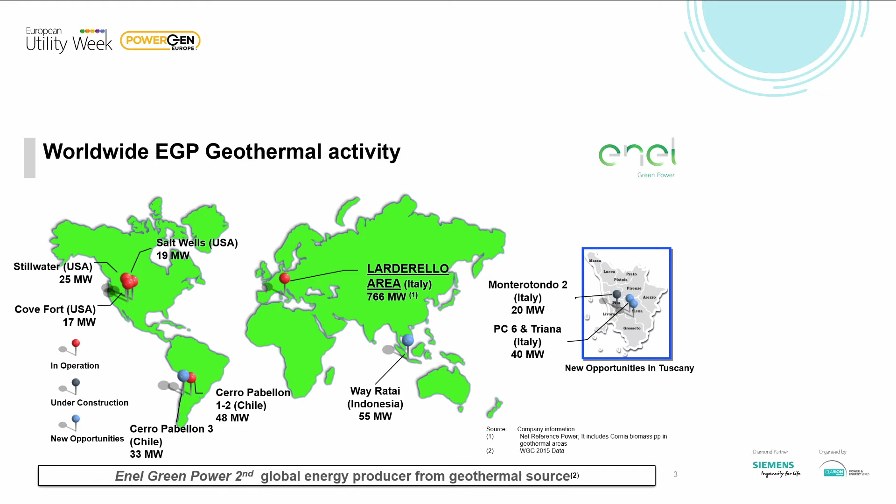Enel Green Power has also some power plants in North America, 2 in Nevada and 1 in Utah, and another in South America, in Chile, at Cerro Pabellon. There are also other projects ongoing, like the third unit in Cerro Pabellon, a new project in Indonesia, and so on. I'll go quickly.

About Enel Green Power activity in Italy. As said before, 37 power plants are in operation with more or less 500 production and reinjection wells. These 37 power plants guarantee a yearly electric production of more or less 5.7 terawatt hours, which covers 30% of the electric demand of the entire Tuscany region.

The geothermal activity in Italy, in Tuscany, also involves more or less 1,800 employees, including direct and indirect employees. Here I reported also some strength points about Enel Green Power in the geothermal field.

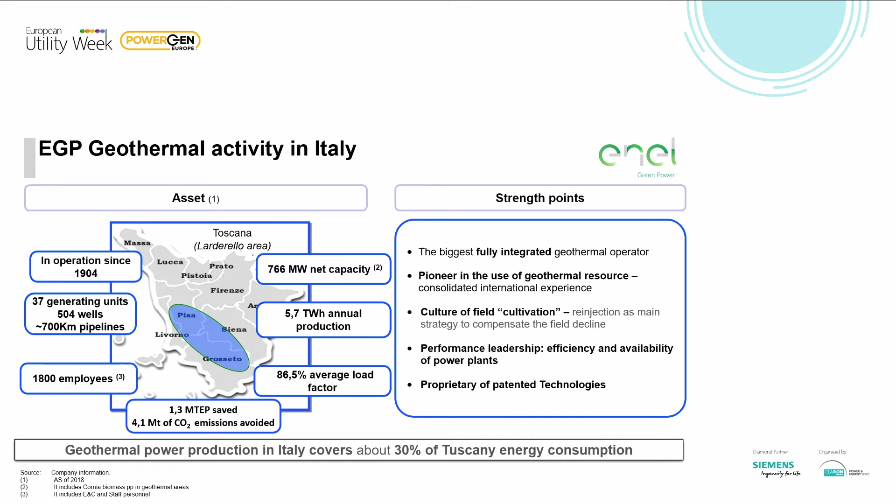Enel Green Power is the biggest fully integrated geothermal operator, which means that Enel Green Power covers internally all the different phases of a geothermal project, from the resource assessment, drilling phase, design and construction of the power plant, to the operation and maintenance of the power plant. Enel Green Power is also proprietary of patented technologies like AMIS technology, which is used for the pollutants abatement in the geothermal gases.

I want to give you some information also about the history of geothermal production. As you can see from the slide, the first geothermal power plant in Italy and in the world was realized in 1913, named Larderello 1, with a power of 250 kilowatts. Then the second power plant was realized in 1937. Then during the Second World War, these two power plants were destroyed. And then the third power plant was realized in

1948, Larderello 3. Here I reported also some pictures of famous scientists visiting the Larderello power plants: Marie Curie in the first picture and Enrico Fermi in the second one. Going forward, at the end of the 70s and the beginning of the 80s, some improvements have been implemented, like exploration and development of deep reservoirs, the start of the reinjection of the geofluid, and also district heating.

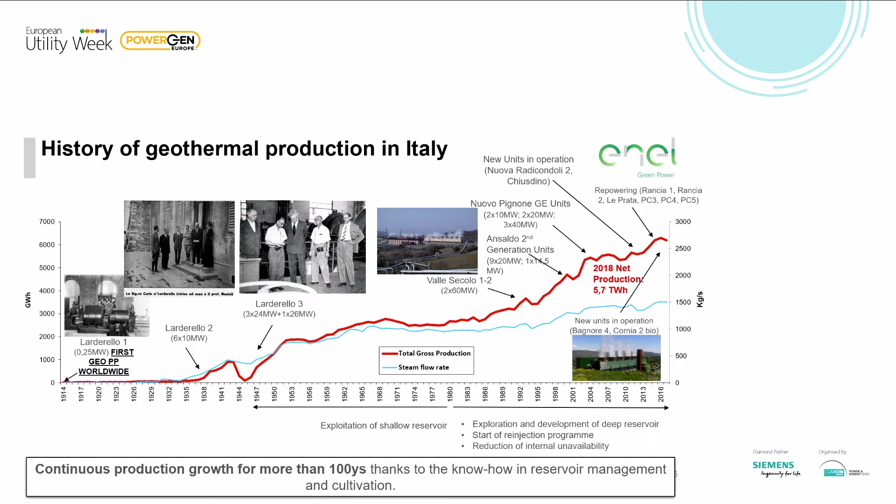Then nowadays, as I said before, the 37 units in operation guarantee a yearly electric production of 5.7 terawatt hours. An important activity from a sustainability point of view is represented by AMIS technology. As I said before, AMIS technology has been patented and developed internally by Enel Green Power, and is used for the abatement of the pollutants, mercury and H2S, present in the gas phase of the geofluid.

Here in this slide you can see the classic configuration of an Italian geothermal power plant, where the steam coming from the production well passes through the turbine, then flows into the direct contact condenser. In the direct contact condenser, the condensed steam is separated from the gas phase, which is sent through a multi-stage compressor to the AMIS plant.

The AMIS plant consists of three main stages. The first one is the mercury absorption in a fixed bed reactor using activated carbon, for example. The second one is the catalytic oxidation of H2S to SO2 in another fixed bed reactor. And the third stage is the SO2 scrubbing in the liquid phase using sodium hydroxide in order to guarantee the abatement. The AMIS technology guarantees very high abatement efficiency and very high availability.

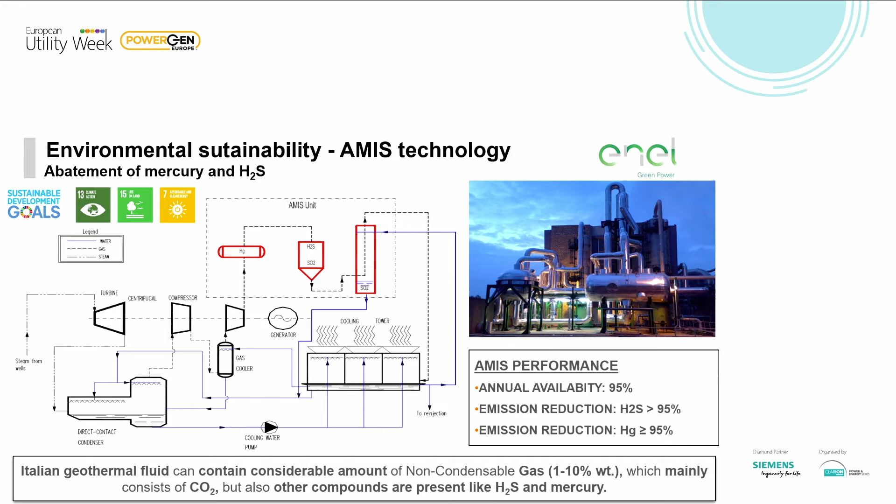Just to give you an overview of this technology, the first AMIS plant was installed in 2001 in the Bagnore 3 power plant. Then in the following 15 years, this technology has been implemented in all the geothermal power plants in Italy. From this graph, you can appreciate the effect of AMIS technology implementation on the H2S-specific emission from the geothermal power plants, which passes from 6 grams per kilowatt hour in 2000 to less than 1 gram per kilowatt hour in 2015.

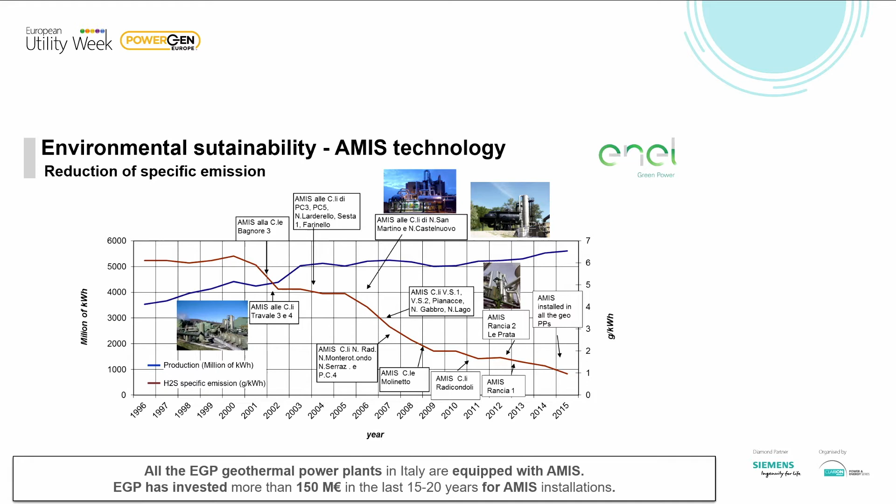Another example of the AMIS technology implementation effort is reported in this slide, where two maps of the Mount Amiata geothermal area air quality are reported. The first one is related to the past scenario, where 6 power plants were in operation not equipped with AMIS technology. The second map is related to the current scenario, where 6 power plants are in operation with AMIS technology.

As you can see, the maximum H2S concentration in the past scenario is higher, more or less 1 order of magnitude, with respect to the H2S concentration in the current scenario. So the effect of AMIS technology implementation on the air quality of the geothermal fields is evident.

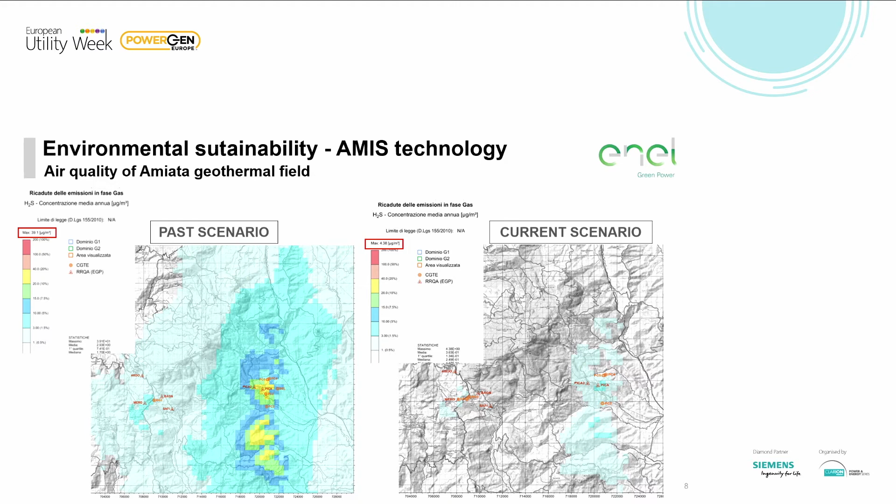Another very important activity from a sustainability point of view in the geothermal field is the heat supply chain. Thanks to the geothermal source, Enel Green Power is one of the most important Italian operators in district heating. The first district heating plant was put in operation in 1985.

Nowadays, some district heating plants are in operation, which deliver yearly more or less 370 gigawatt hours of thermal energy at very low cost from a renewable source to more than 10,000 customers in Tuscany, including some municipalities, some greenhouse facilities, and other industrial activities in the food sector.

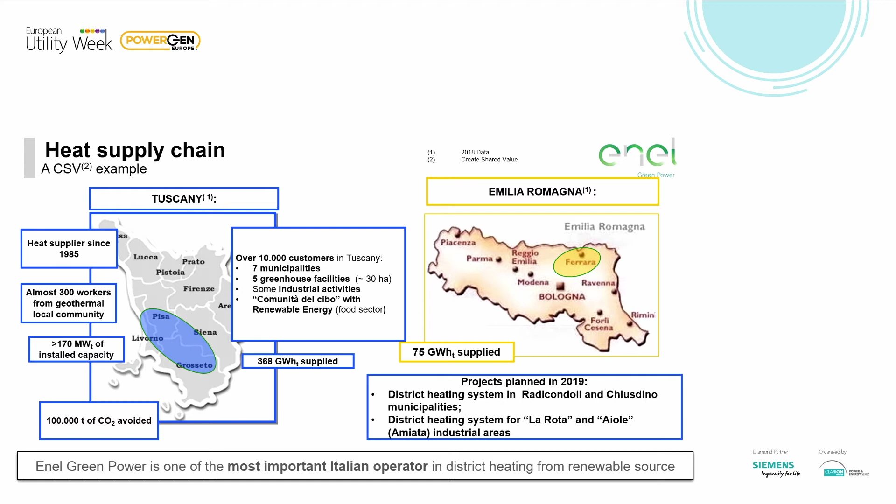Enel Green Power also has another district heating plant not in Tuscany, but in the Emilia-Romagna region near Ferrara city. This district heating plant delivers yearly 75 gigawatt hours of thermal energy for the heating of Ferrara city. Other projects are ongoing in 2019, like the district heating system in Radicondoli and Chiusdino municipalities and the district heating system for La Rota and Aiole industrial area in the Amiata geothermal area.

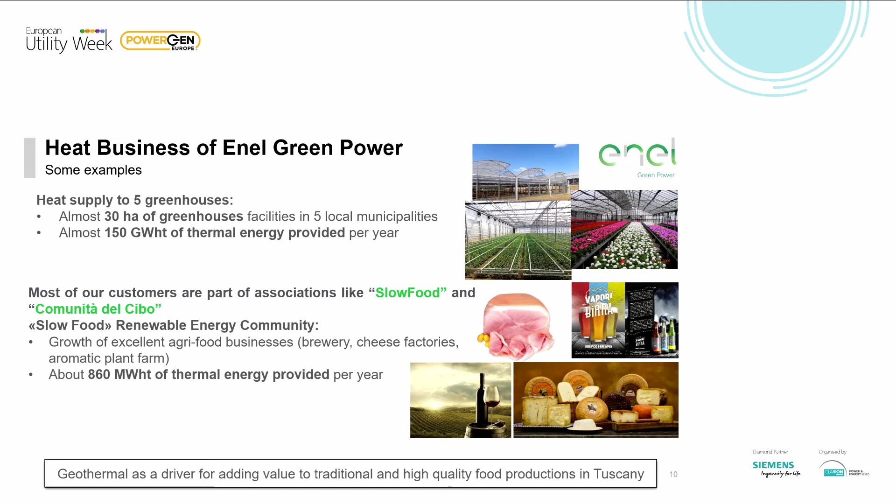Here I reported some examples of district heating in Tuscany. As I said before, Enel Green Power has some district heating plants which deliver thermal energy to 5 greenhouses where some kinds of flowers, plants, or vegetables are produced. Another example is related to the food sector. The district heating plants of Enel Green Power deliver more or less 860 megawatt hours of thermal energy to these farms, where typical Tuscan foods are produced, like ham, wine, cheese, beer, and something like that.

Other initiatives for geothermal source reuse are mainly focused on CO2 reuse. As I said before, the geothermal fluid in Italy, but also in other geothermal areas worldwide, is characterized by a gas phase which mainly consists of CO2. This CO2 is not produced in the geothermal power plants, but derives from the underground, passes through the power plants, and then is emitted. Considering also that geothermal areas are naturally characterized by CO2 emission from the soils, the most sustainable solution for geothermal field exploitation is not gas reinjection, but reuse for different applications.

Here I reported 2 initiatives of Enel Green Power for geothermal CO2 reuse. The first one is related to spirulina production, which is a microalga with a very high protein content, a superfood. In this initiative, we have evaluated the possibility of spirulina production using geothermal sources like CO2 and heat. In the second initiative, Enel Green Power is signing an agreement with another company aimed to use geothermal CO2 for sparkling water and other drinks.

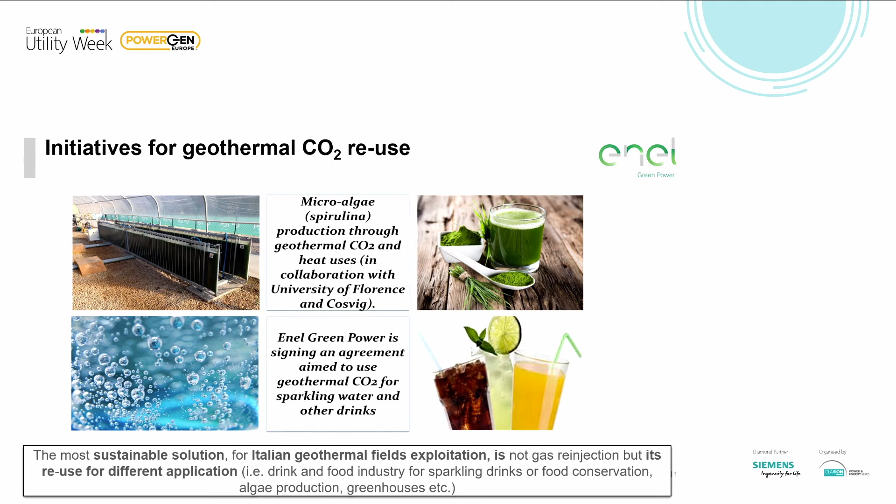The first initiative was born from an idea of circular economy, where essentially the steam coming from the production well is first used for power production. Then the gas is fed to the AMIS plant, where the pollutants are abated. The condensed steam at the outlet of the power plant and the purified CO2 are sent to the spirulina plant, where the CO2 is used as a carbon source for spirulina growth. The condensed steam transfers its remaining heat at low temperature, more or less 40 degrees Celsius, to the spirulina plant, then is sent to reinjection.

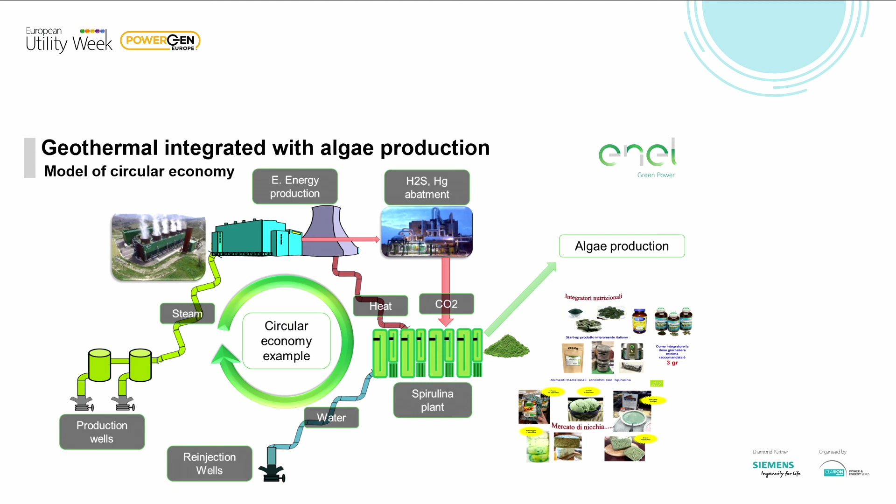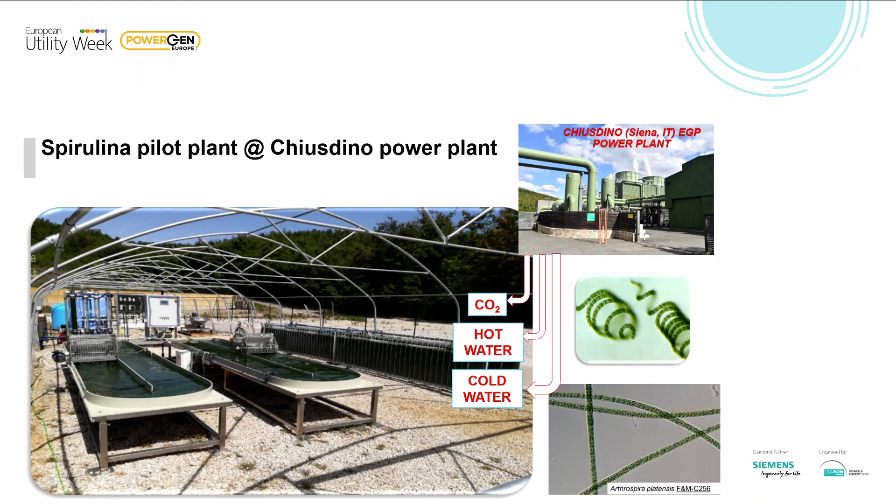Based on this concept, an experimental project has been carried out in collaboration with the University of Florence. In this project, a spirulina pilot plant has been realized near the Chiusdino geothermal power plant, and some tests have been carried out using geothermal sources like CO2, hot water, and cold water. Here I reported the main results after 1 year of experimentation. Producing spirulina using geothermal sources led to a cost reduction of up to 30%, mainly related to heating and CO2 costs, and to a production increase of up to 20%.

Based on these interesting results, 20 areas suitable for full-scale spirulina plants have been identified near geothermal power plants. Nowadays, one spirulina plant is under design and other projects are under evaluation. The impact of this project can be very important from a social point of view, because each hectare of cultivation requires more or less 5-8 workers, and also from an environmental point of view in terms of CO2 emissions avoided. So basically, these are the main initiatives of Enel Green Power to increase the sustainability and acceptability of geothermal exploitation in Italy. Thank you for the attention.

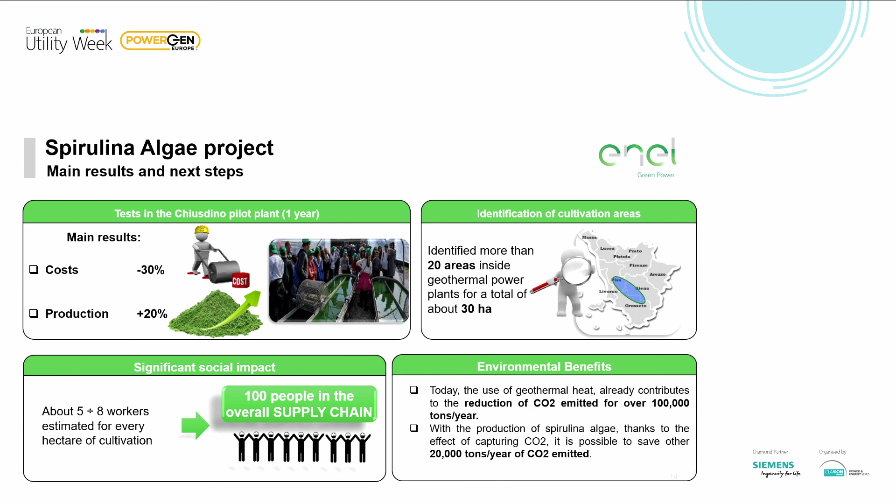I have a question for you too. I also have a question here, but first I want to hear anybody in the audience with a question? Gudrun here in the front, please throw the microphone.

Thank you. One question on future geothermal projects in Italy. Do you tend to go more toward using the heat from geothermal plants, or do you also plan to build new geothermal power plants? Our plan as Enel Green Power is to increase electric production, so our first goal is to increase the power side. But the geothermal source is suitable for heating, so I suppose the district heating part will also increase in parallel.

Thank you very much. Any more questions? Oh, sorry. I'm not trying to push you around. If not, then thank you again, Marco, for your presentation.